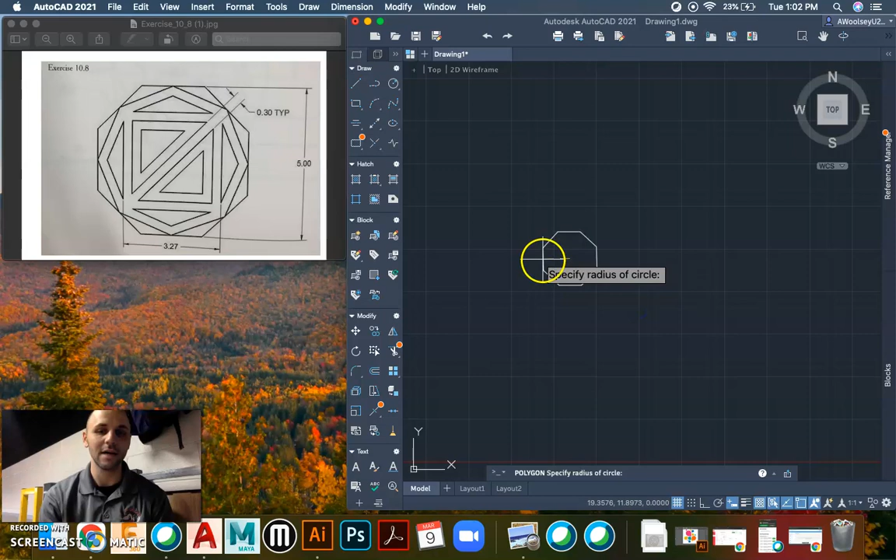And now it wants to know, is it inscribed or circumscribed? So is the octagon outside of the circle for circumscribed, or is it inside? So in this case, it's outside of the circle because the circle would be touching all of these sides, hence why it gives us the 5 from flat side to flat side. So I'll hit circumscribe. And then a big mistake people make is they type in 5, but it wants to know the radius, which is half of that. So it's 2.5.

Okay, so we have like a little stop sign here. We zoom in, get it nice and centered. Okay, and now I can take my drawing and I want to create another shape here. So I'm going to figure out where the center of this object is. So to do that, I'll do line. I'll go corner to corner. And once again, another line, corner to corner. So now I have my center.

Okay, now I'm going to create my next shape here, which is another one of these octagon shapes. For this one, though, I'm going to just go from midpoint to midpoint to midpoint to midpoint and draw it out by hand, because it's easier this way. So I'm going to make sure my snap for midpoint is on. Good, it is. And then I'll type in line. And I'm going to go from triangle to triangle to triangle and keep going around my object here.

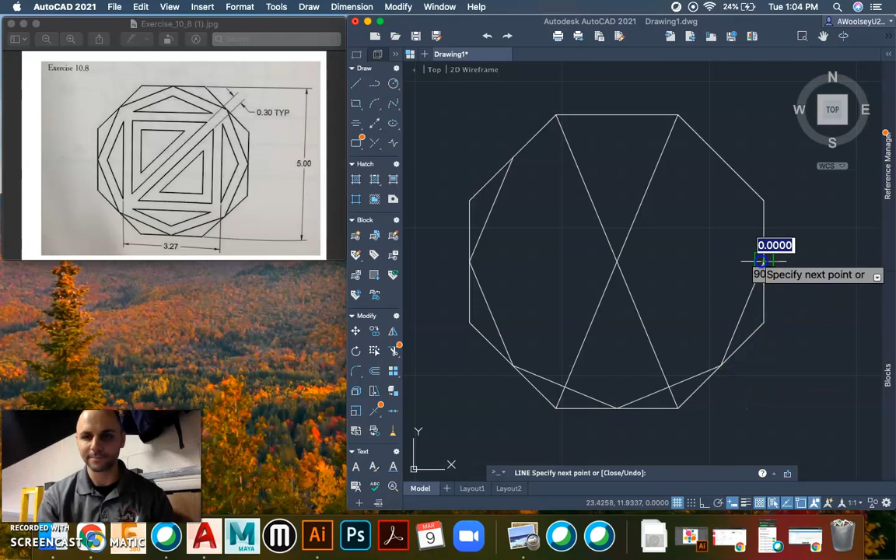Now we're going to learn a new command on this drawing, which is called join, because right now all of these lines are separate. It's like we exploded them. So if I select all these lines, and I know my grip points are bigger than yours, I purposely have made them larger so you can see what I'm doing. Okay, I got them all selected now, and I type join. It's going to make this all one shape. It's kind of cool. You can explode to break it apart, join to join it together.

And now I'm going to do my first offset. So I'm going to offset this in. Okay, and it's the same as all the other offsets. It's 0.3. So I'll type in 0.3, and I will click and bring this in. Okay, and that's going to be this shape right here. Then what I'm going to do next is I'm going to draw this square here.

Okay, so, or rectangle. So if I go to the rectangle tool, it wants to know what my first corner is going to be. So this can be kind of tricky and kind of deceiving where it's going to go. Some people would think here, some people would think there. It kind of confuses you. So maybe the rectangle tool won't work. But I think there are many ways we can do this. This is not the way I would do it, but I think it's the way that will make sense to the most people. So what I'm going to do instead is I'm going to do some offsetting here.

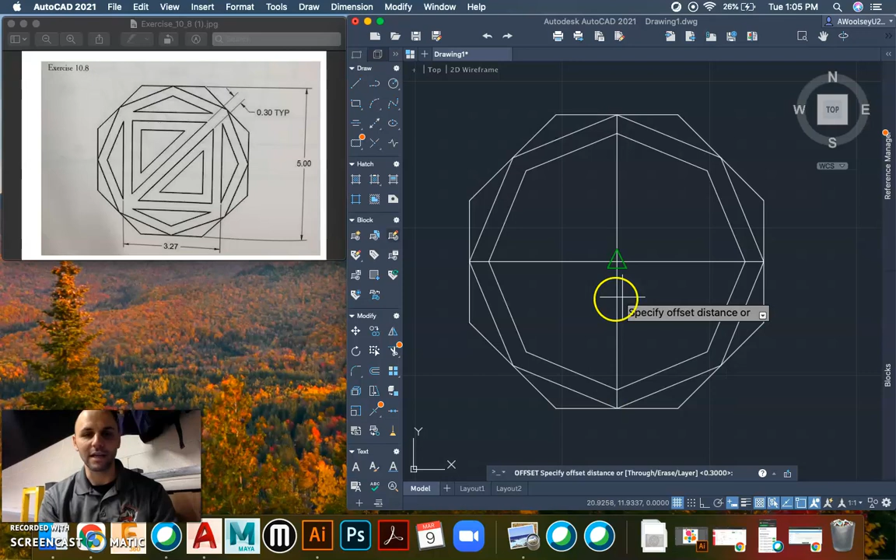So I'm going to offset, and I divide 3.27 by 2. So break out the calculator here. Okay, 3.27 divided by 2 is 1.635. So I'll type that in, 1.635 as my offset. And I'm going to offset down, offset up, offset over.

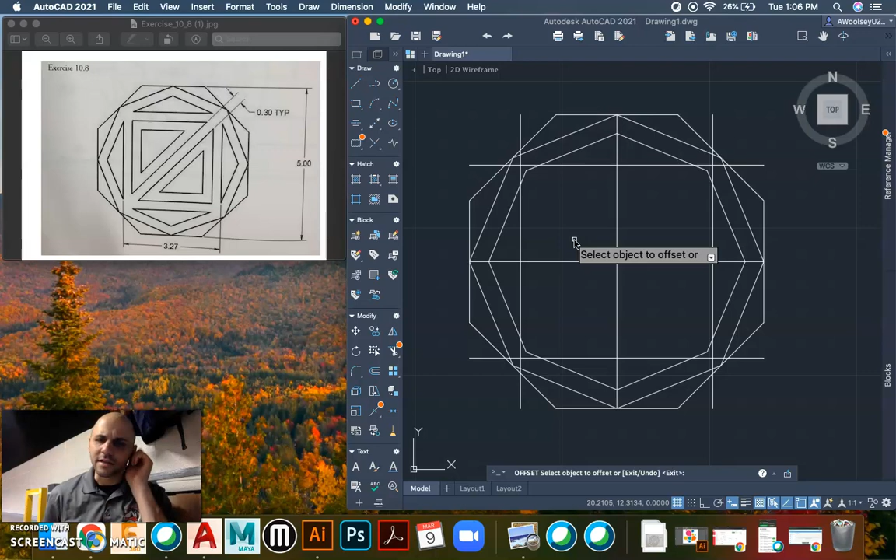Okay, and I'm going to offset over again. Okay, so that's looking good. So now I'm going to go ahead and I'm going to do some trimming. Trim, enter, and now I can trim away these little extra bits of the square that I just drew. Now don't go crazy here with trimming because there'll be a little shortcut. If you do, you could always go back and fix it another way. But I'm going to leave the square as a square.

I know you're probably thinking, oh, Mr. Woolsey, you can do some more trimming there and you could really clean up that drawing and get it kind of mostly done. But I want to use this square to help offset some more squares. So I'm going to click on the lines that make up this square. Okay, I got them all selected. We're going to use our fancy new command join to join them together. We're going to offset 0.3. And I'll click. I'm going to bring one inside, and then I'm going to bring, I think, one more.

Okay, and now I can get out of offset, go back to trim, press enter, and I can trim away these lines here and make the triangular shapes, which I could have done before, but then I would have been left with trying to redraw another square. But instead, I was smart about it and I was able to skip a step with that.

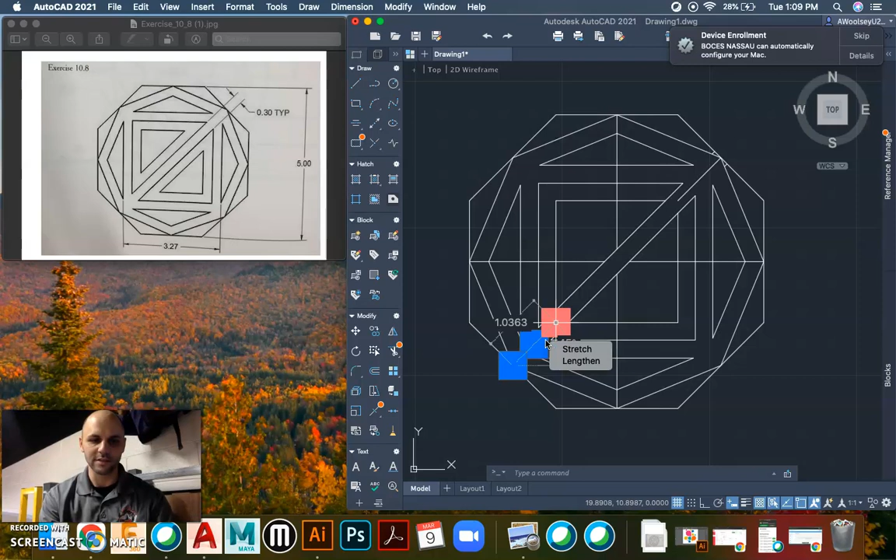Okay, so I'm just trying to trim this away. So, get rid of some of these extra lines here. Nope, I don't want to stretch this line. Okay, trimming away. Okay, and we're probably starting to see I need to draw one more line I have to offset. Okay, I got some little lines here I got to get rid of.

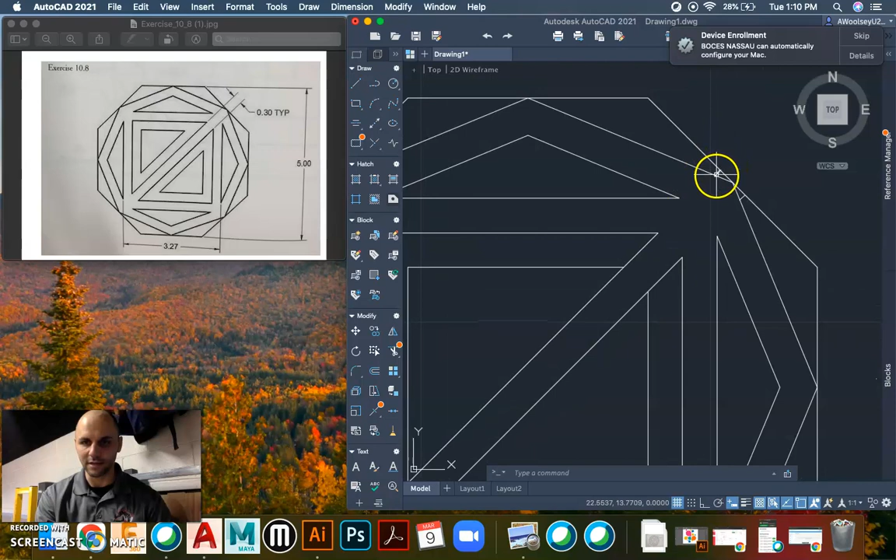And really we should be at the point where we should be starting to get a little bit more independent with these. I know we like to look at my drawing and see exactly how I do it, but I'm not going to be doing these drawings with you forever, so you got to start being able to come up with your own ideas of how to solve the problem.

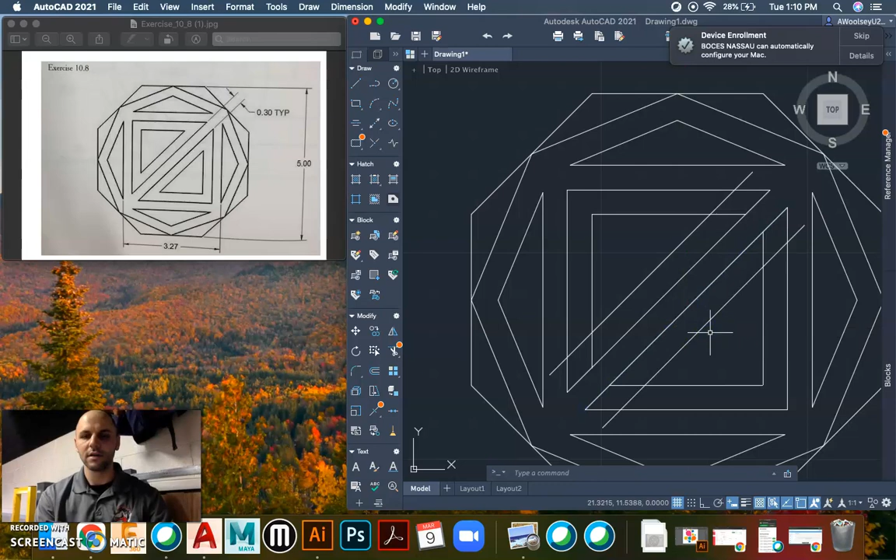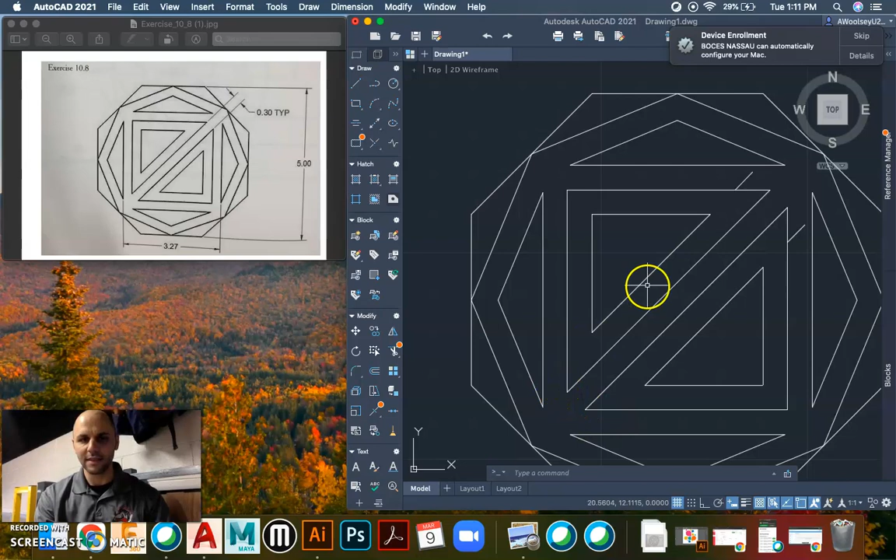So I'm going to offset again. Same distance here. We're going to change it to 0.3, and now I'm going to offset this line up, this line down, and then I'll trim again, enter, and now I can trim away and make the triangle inside of a triangle. Okay, so I can now delete these, and I think I am done with this drawing. Once again, it looked a little bit complicated, and I had my mistakes. Nobody's perfect here. Okay, but I was able to finish this drawing, and I hope you find this video helpful.

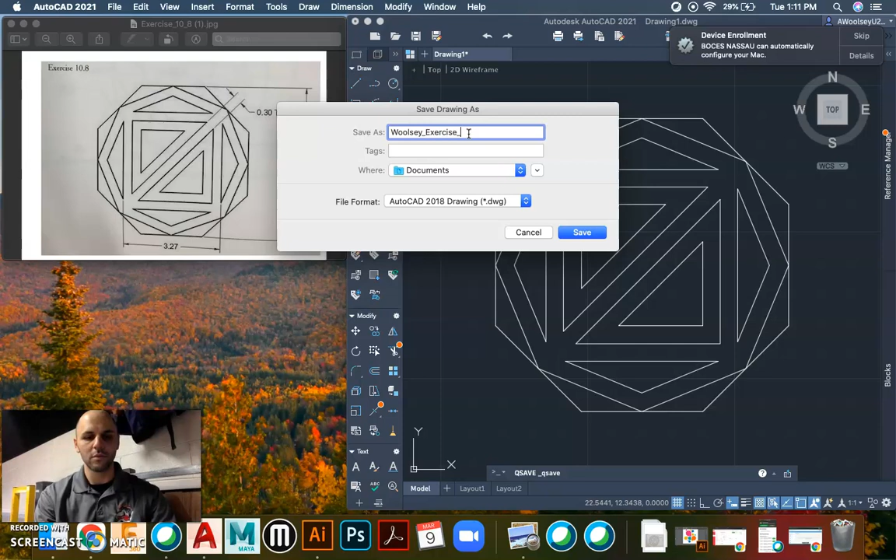So I'm going to save it. Okay, I always call it my last name. And then this is exercise, exercise number 108 or 10.8. And then I'm always going to print it too, so I get that file that I can submit to Canvas. Okay, draw a little window around it. And I will do the same thing. Get it saved up. And that's it.